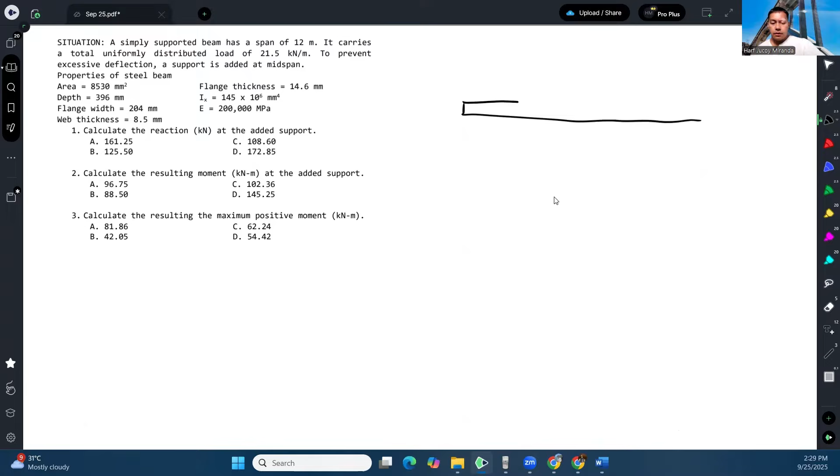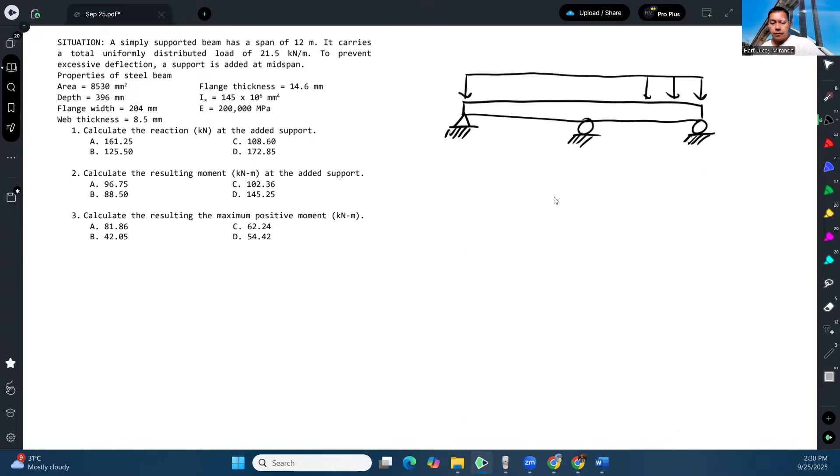So it's a simply supported beam, then a support is added at the midspan, with a uniformly distributed load W. Let's say our span is L. Since the support is at the midspan, each side is L over 2.

So how do we find the reaction? Actually there are many ways, but the first one I'll present is using the superposition method, because our loading here is simple.

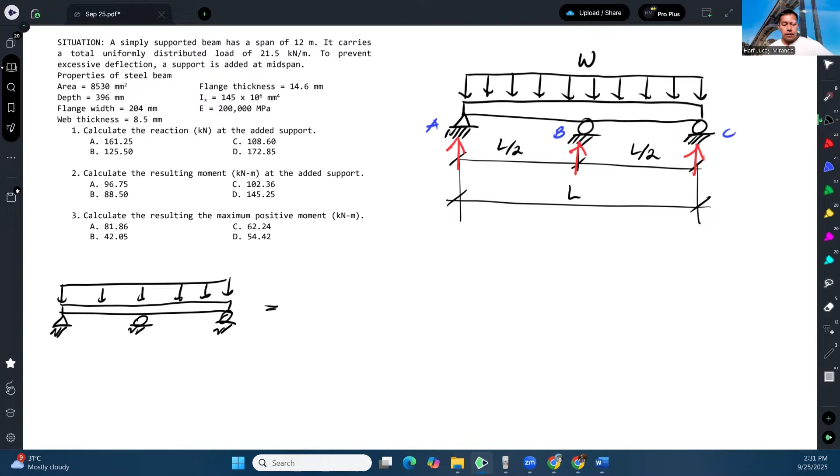Let's call these point A, point B, and point C. By superposition method, that loading condition is equal to this, plus this.

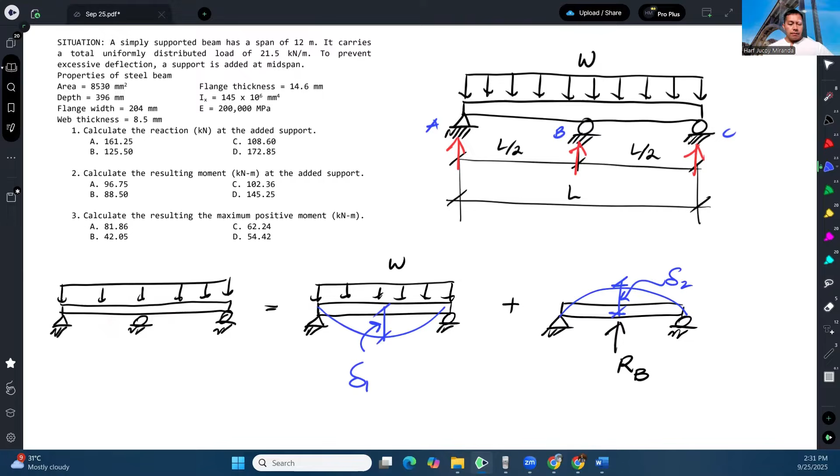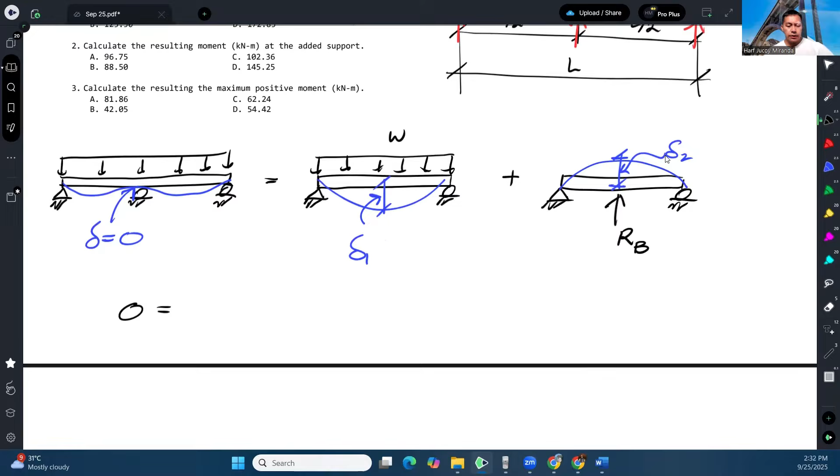So by superposition method, 0 is equal to negative delta 1 plus delta 2, which gives us that delta 2 is just equal to delta 1. But what is delta 2?

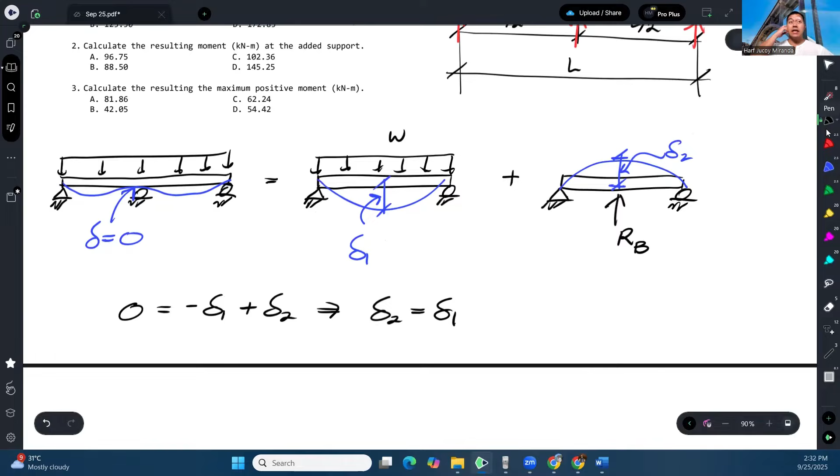This is where we need to remember our formulas. The deflection formula for a simply supported beam at midspan with a uniformly distributed load throughout is given as 5WL to the fourth over 384EI. This is good, we should memorize this since we often encounter it. For a concentrated force, it becomes PL cube, or RB L cube over 48EI.

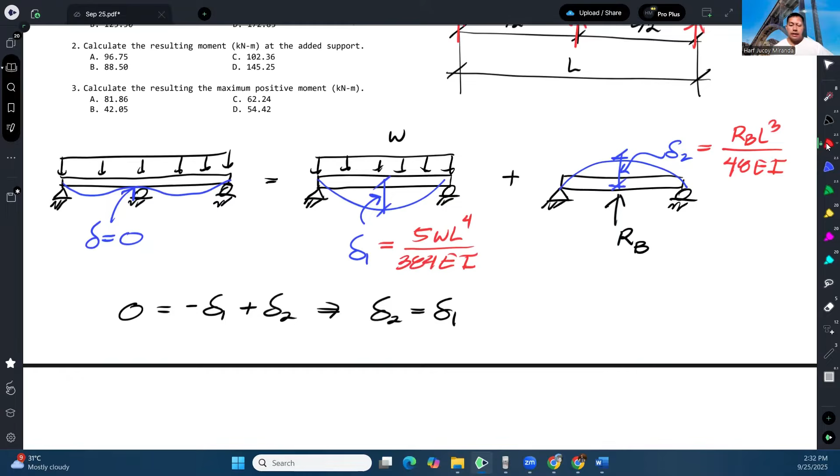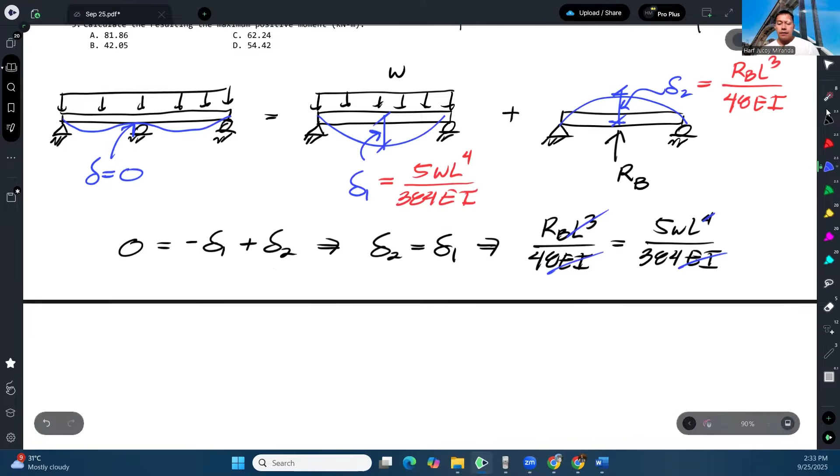Substituting those values, we have RB L cube over 48EI equal to 5WL to the fourth over 384EI. First, the EI cancels, and L cubed cancels, leaving just L. From here, we can calculate the reaction RB to be equal to 48 times 5 over 384, which gives us 5 over 8.

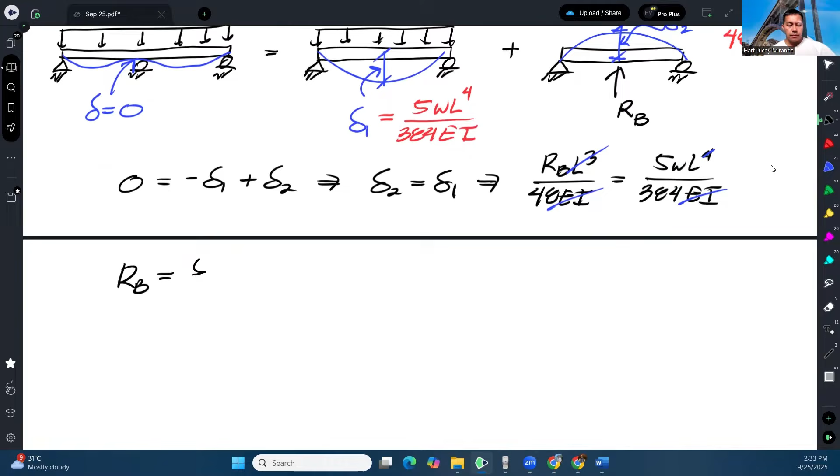And then WL. So this is our reaction at the midspan, 5 over 8 WL. Now that we've calculated the reaction at the midspan, we can calculate the reaction at A and at C, which turn out to be equal.

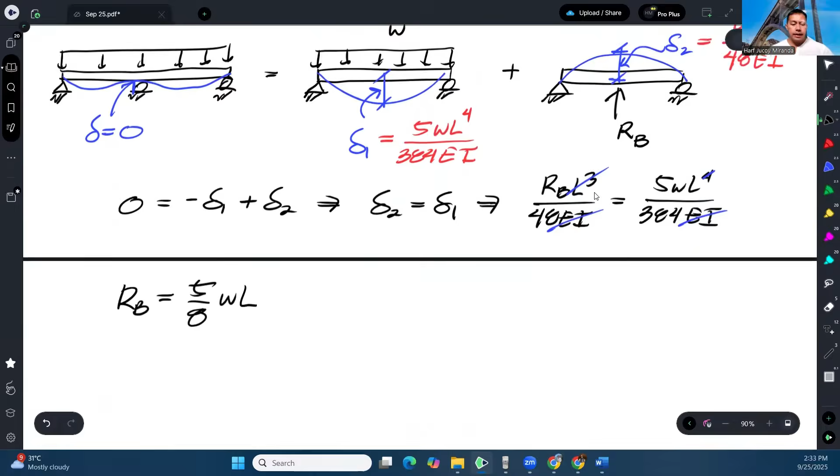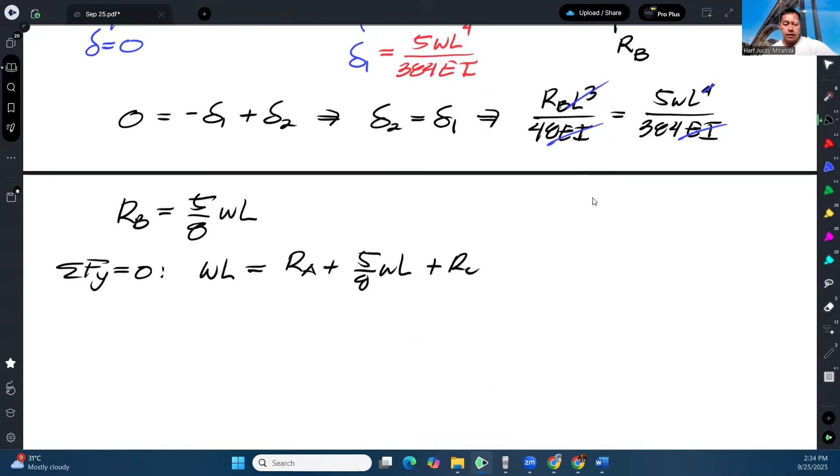So what we do is set summation of forces Y equal to 0. We have W times L equal to RA plus RB plus RC. But because of symmetry, RA must be equal to RC.

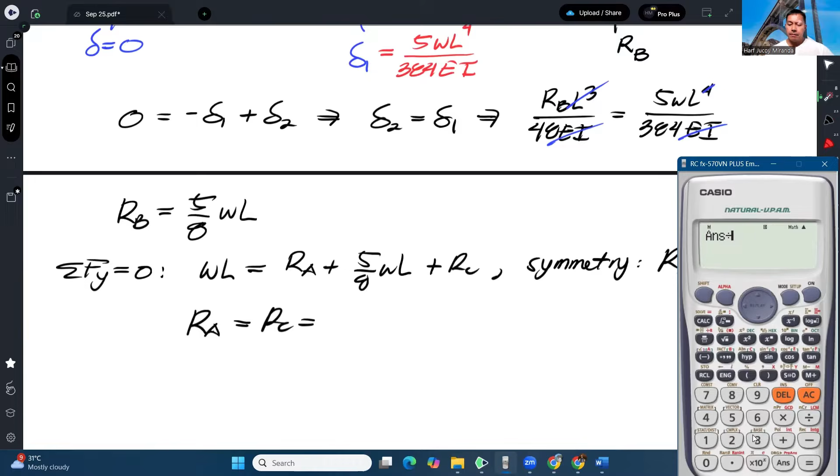So it turns out RA is equal to RC, equal to WL minus 5 over 8, divided by 2. So that's the reaction at A and at C, which equals 3 over 16 WL.

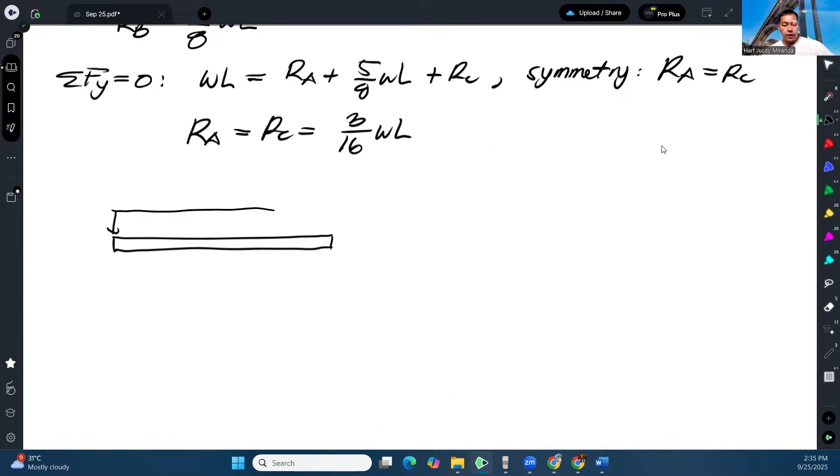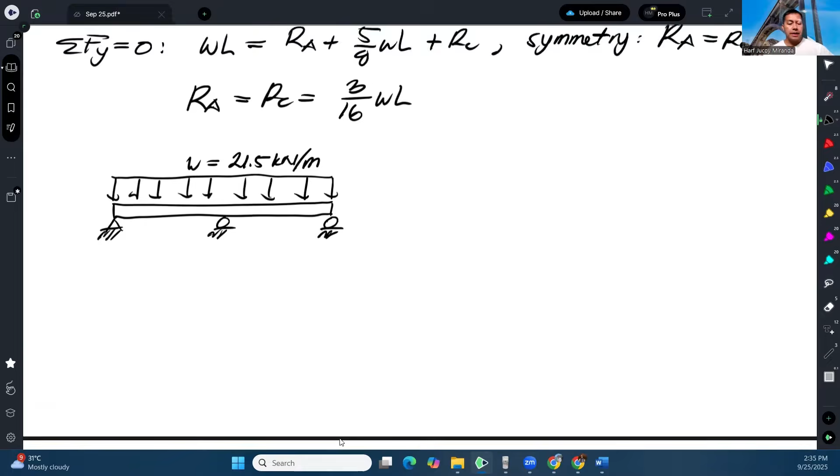Now we know what W is, from the given, W is 21.5. And our span, the full span is 12 meters, so each side is 6 meters. Take note, the full span is 12 meters. So we can calculate the reaction here.

At the sides, 3 over 16 times WL, which gives us 48.375. And at the middle, 5 over 8, giving us 161.25.

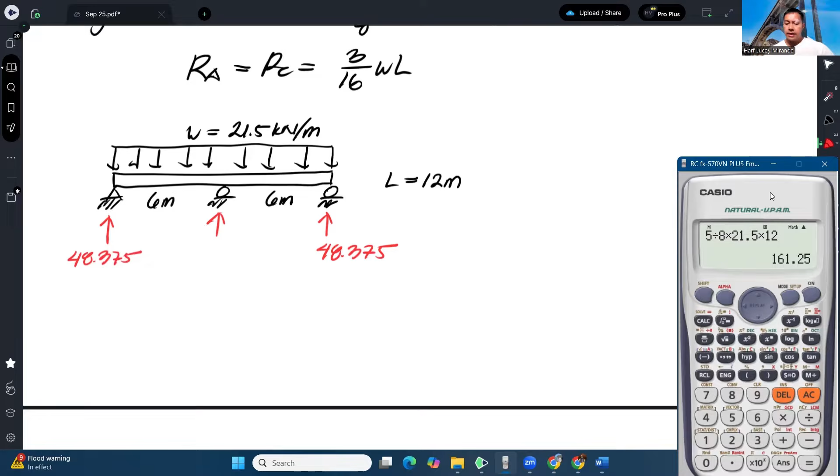So when we draw the shear diagram, it looks like this: it rises by 48.375, then decreases by 48.375 minus 21.5 times 6, which is the area of the load, giving us negative 80.625.

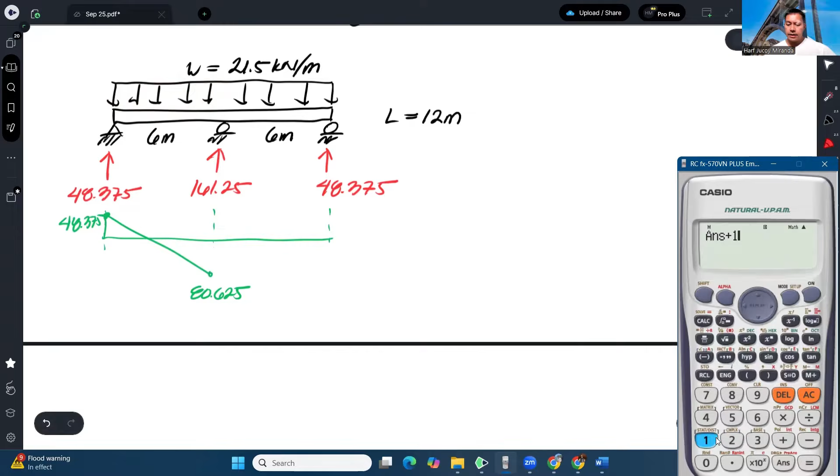Then at the middle, we add 161.25, the reaction, giving us 80.625. Due to symmetry, it comes back down to 48.375. So that's our shear diagram.

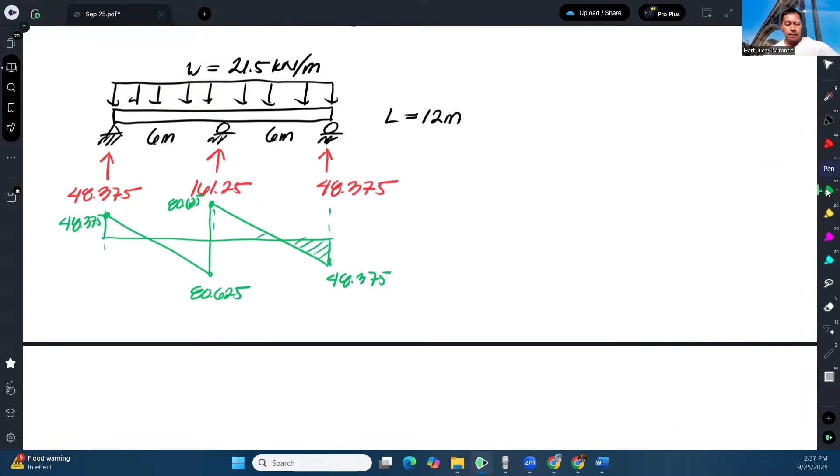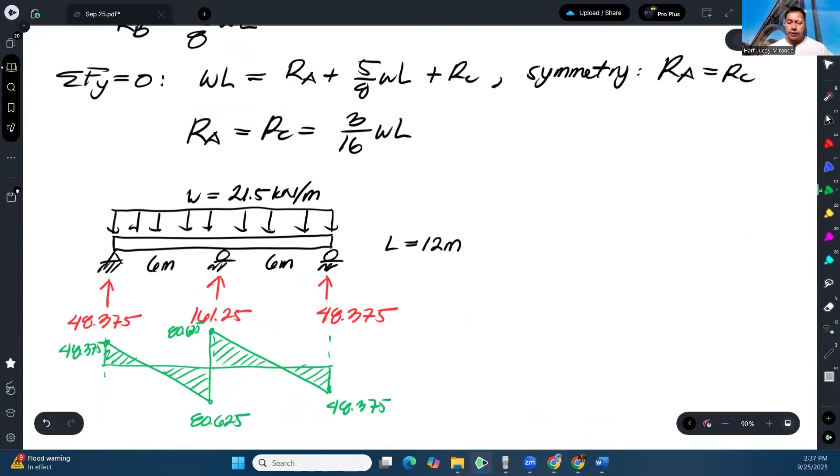Okay, hindi naman tinatanong yung shear. Actually, tinatanong pala yung reaction sa support. So bali, ito na yung sagot natin sa added support. Ito, reaction sa added support. Okay, so our answer for number 1, letter A.

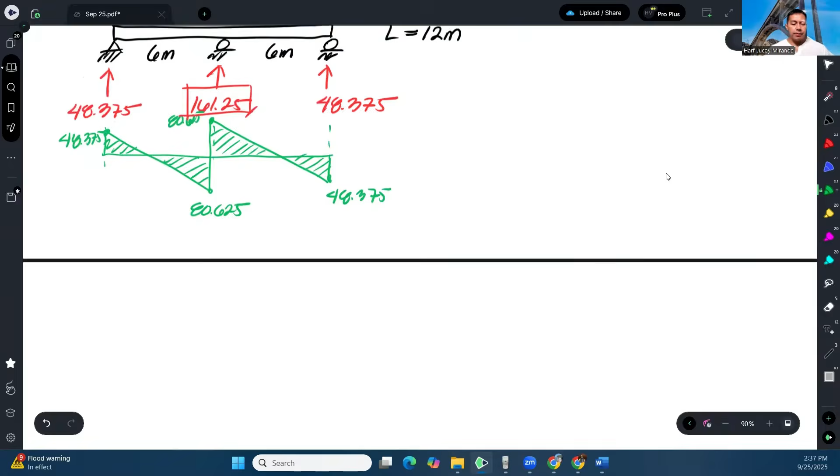So pinapahanap naman yung moment sa added support. Para masagot natin yon, i-drawing na lang natin yung moment diagram. Para ma-drawing natin yung moment diagram, ito yung point of zero shear. Ito, tsaka to. Yan, yun yung mga point of zero shear. Yung sa gitna, walang problema kasi alam natin saan located yan. Ito lang yung problema natin, saan to.

So tawagin ko na lang to na X. Kung X yan, itong kabila, 6 minus X. Okay, so by ratio and proportion, we have X over 48.375 is equal to 6 minus X over 80.625. So from here, we can solve for X.

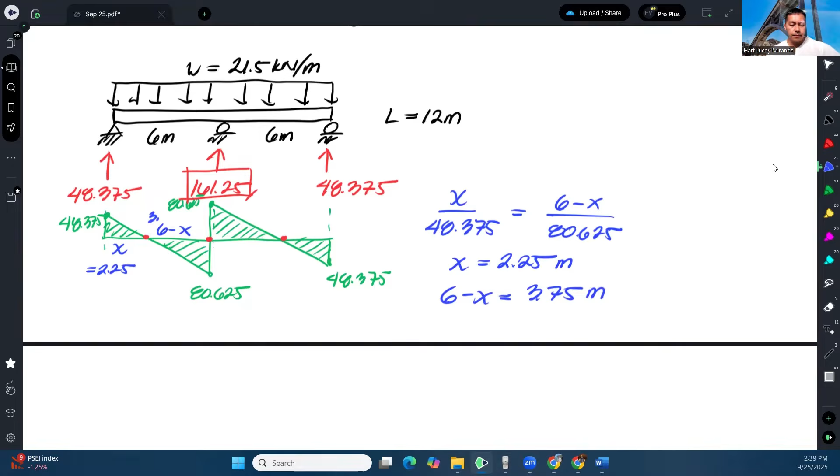So that gives us 2.25. So therefore, yung 6 minus X ay 3.75. Okay, so this is 2.25. This is 3.75. Okay?

So we can now continue drawing our bending moment diagram. Ayan, okay? So starting off with the area of this, na area niyan, so 1/2 base times height. So that is 54.42.

Ayan, so ang itsura ng diagram ganito. And then ima-minus naman natin tong area na to. Okay, so minus 1/2, 6 minus X times 80.625. So that gives us negative 96.75.

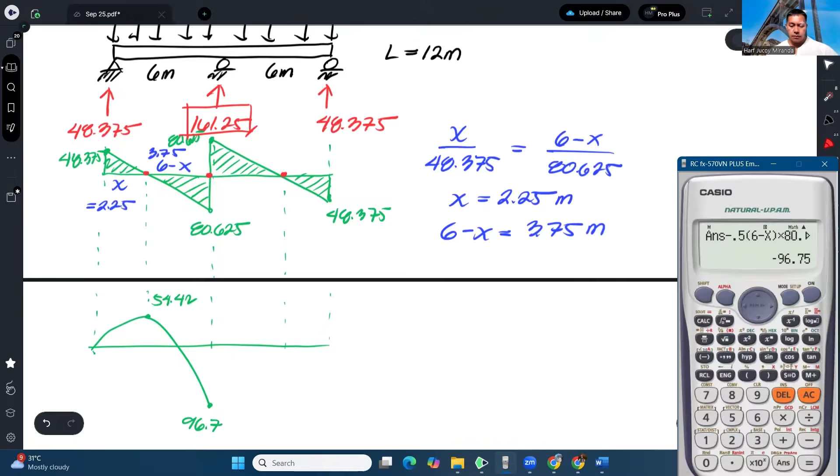Okay, and then due to symmetry, lalabas lang dyan, ito naman magiging 54.42 tas ito 0. So ganyan itsura ng bending moment diagram. Okay, and lumalabas ngayon na yung resulting moment at the added support ay ito. Ito. Okay, so 96.75. So ito yun.

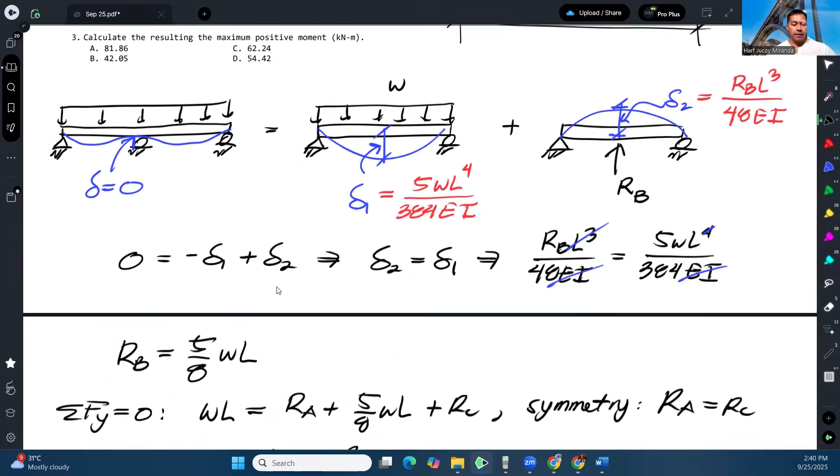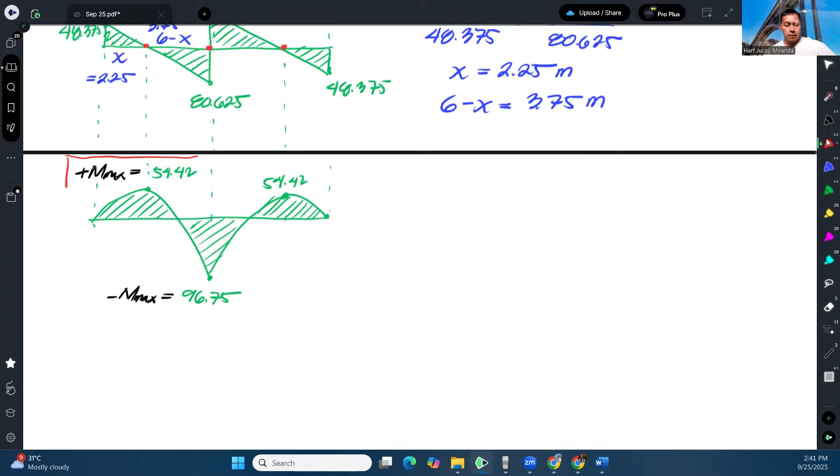Calculate the resulting maximum positive moment. O ano ba yung maximum positive moment? So ito naman yun. So yung maximum negative moment, ito naman yung maximum positive moment. Okay, so that's how you answer that. Okay, so we have 54.42 as our maximum positive moment. Okay, so that's one way of doing it.

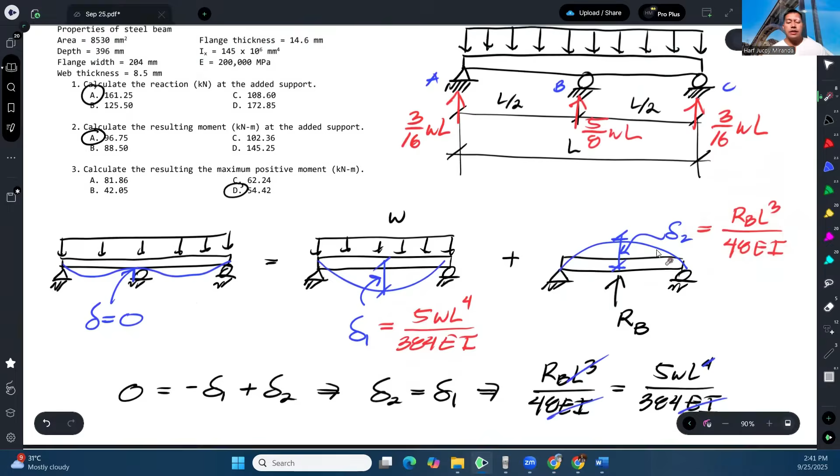Okay, so the key here is really at the beginning, dahil siya indeterminate to the first degree, kailangan mong hanapin yung reaction muna. Yun talaga yung kinakailangan. Kaya ang napili kong gamitin sa pagkuha ng reaction dito is yung superposition method. Ito, kaya kailangan na alam natin yung mga formulang yan kapag mag-superposition method tayo. Which is in this case naman, like I said, common naman itong deflection, common naman itong loading condition na to, common din itong loading condition. Kaya maganda talaga siya, minememorize yan.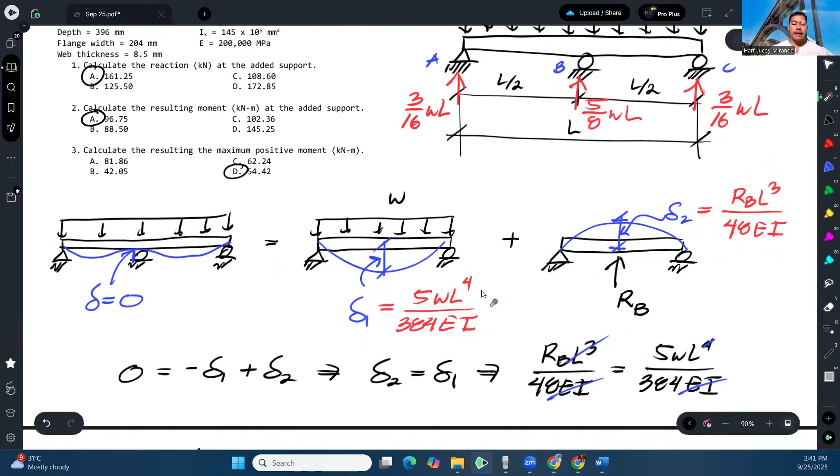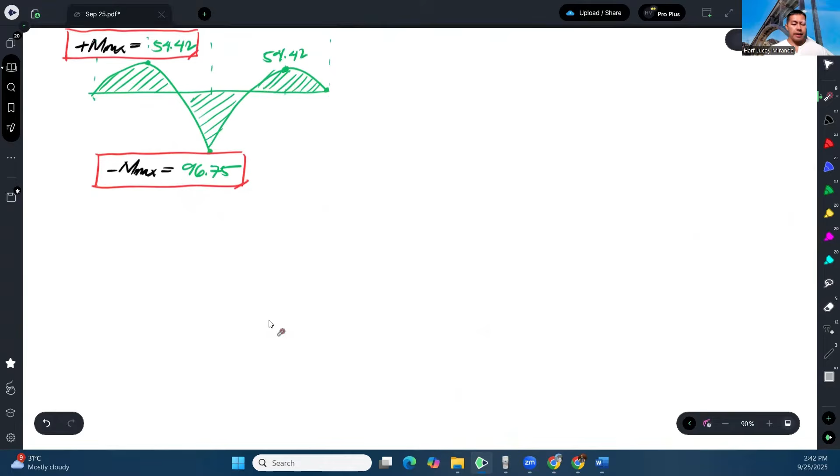Okay, ito, tsaka to. Ito, tsaka to. Okay, kung hindi naman, of course, dito meron ka ring option na mag three-moment equation. Meron ka ring option at mag three-moment equation dito. So kapag ka three-moment equation naman, pakita ko na lang din. So let's say gusto mo three-moment equation.

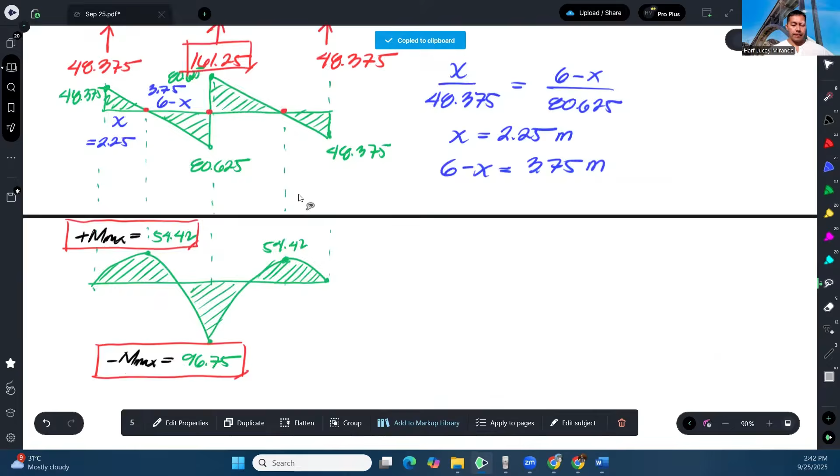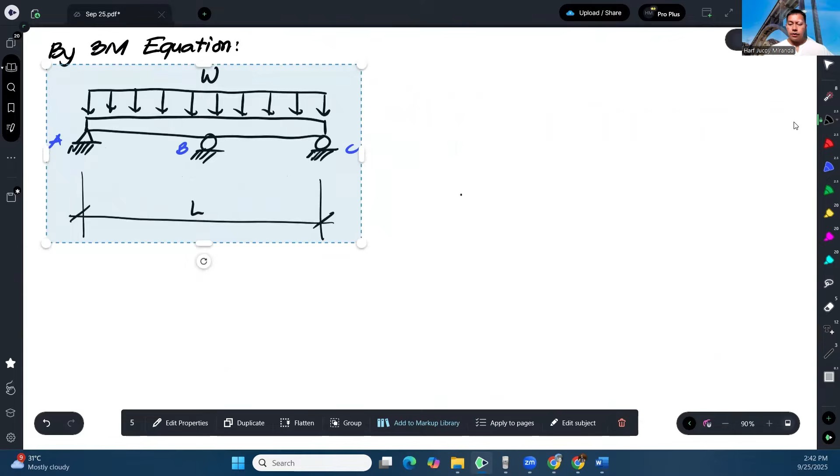Okay, so define muna natin. So di ba dito may in-expect tayo na moment. MA, dito rin. Yan yung moment sa B, tas dito rin, moment sa C. But because the supports at the end A and end C are both simple support, then yung moment dyan ay 0. Okay, parehas 0. So ano ba muna ang moment equation?

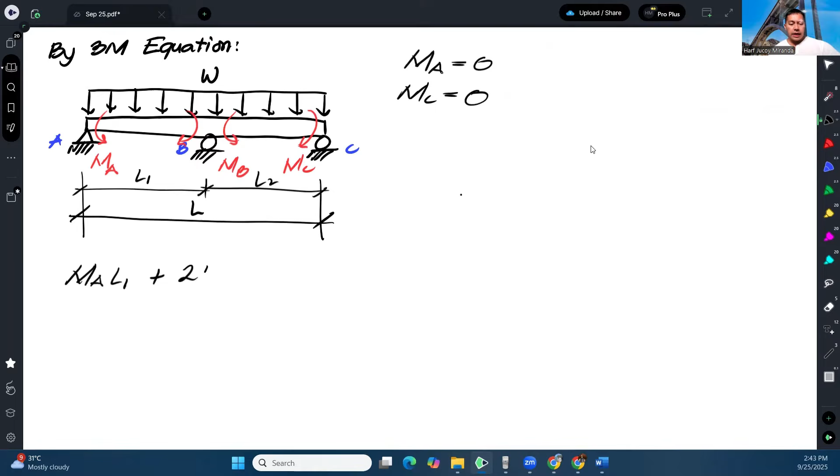So ang moment equation ay MA times L1, kung halimbawang ito ay L1, okay, tas ito naman ay L2. Okay, plus 2 times middle moment times L1 plus L2. Plus moment at C times L2 plus 6A A bar over L plus 6A B bar over L or L1 and then L2 is equal to kapag wala namang deflection, lagay ko na lang 0 pag wala namang deflection. Okay, kumbaga wala naman kasing deflection dito sa mga supports na yan.

Okay, so by the way, it's A1 and A2. So actually, itong part na to lang yung kailangan nating matandaan. Kasi ito yung moment area nung moment diagram nung left and right. Actually, dito, kailangan lang kabisado natin na kung gagamit ka ng three-moment equation, kabisaduhin nyo na lang yung formula ng pagkuha nito. Pero isa lang, na isa lang. Kapag force, isa lang. Tapos meron din tayong formula kapag ka moment yung naka-apply. So doon na lang muna tayo sa force mag-concentrate.

So kapag daw meron kang gantong beam, okay, tapos meron ka ngayon ditong P at a distance A. Okay, tapos kunyari yung span na to ay L. Okay, so the formula there, okay, for 6A1 A bar over L1 will be PA times L squared minus A squared over L. Para naman sa right side, 6A B bar over L2, that is PB times L squared minus B squared over L.

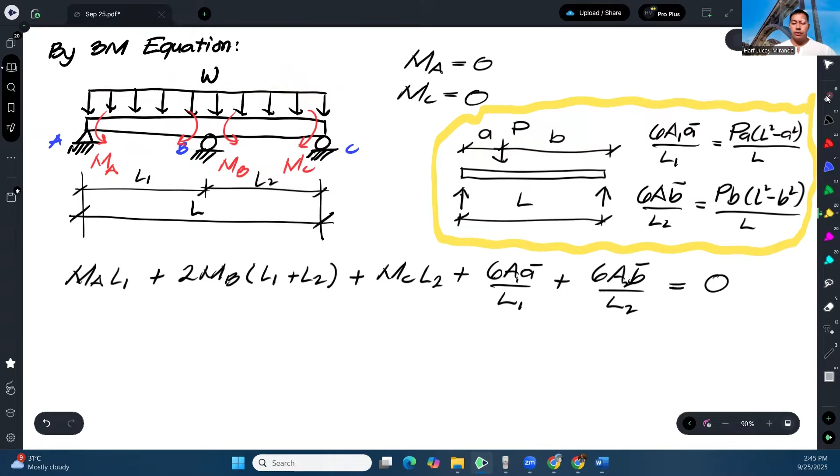As you can see, parang magbabaliktad lang. So kapag ka yung span mo nasa left, ito yung gagamitin mo. Na kapag yung span mo nasa kabila, ito naman yung gagamitin mo. Okay, so parang ganun lang yun. So yan lang yung kailangan natin. So in this case, dahil uniform load, so kapag kakabisado mo to, marami ka nang pwedeng ma-derive kasi. Kaya ito lang yung recommended ko. Pwede mo nang ma-derive lahat kapag ka alam mo to. Okay, so for example, so baba ko muna to.

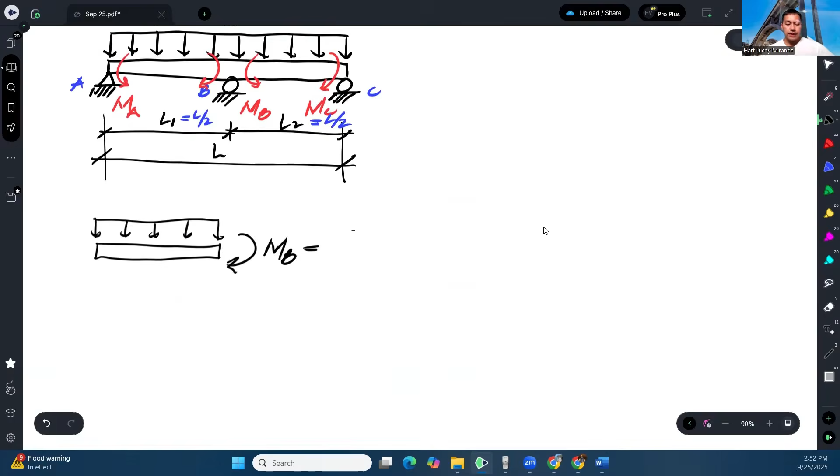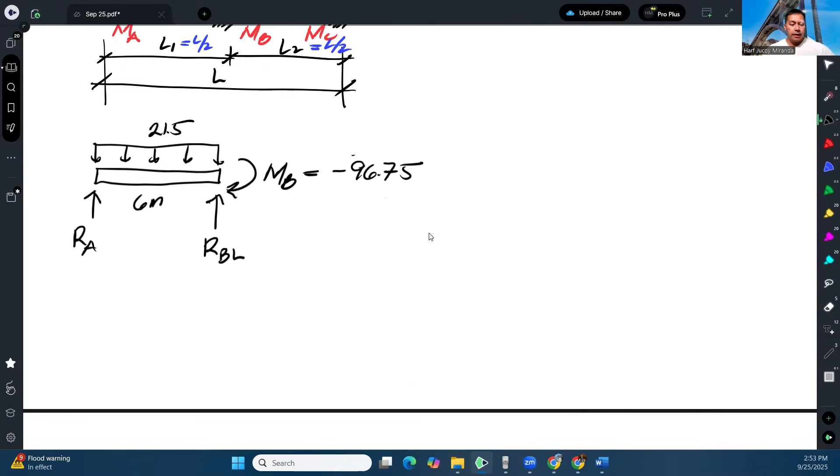So to get the reaction at A, we'll just do summation of moment at B. Assuming counterclockwise positive. We won't put a negative sign since I already proved it's negative based on the direction of the MB, just so it's not redundant.

Okay, so we have 21.5 times 6 times 3. Then 21.5 times 6, times 3. And then RA minus RA times 6 equal to 0. So from here, we can solve for RA.

Ah, something's missing. Sorry, there's still a moment. Okay, then our moment, negative 96.75. Negative because it's clockwise. So therefore, RA can now be calculated: 21.5 times 6 times 3 minus 96.75, over 6. So the reaction at A is 48.375.

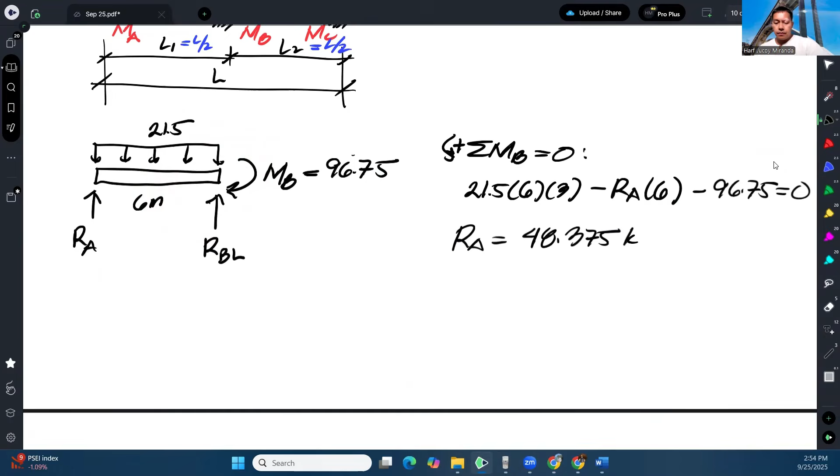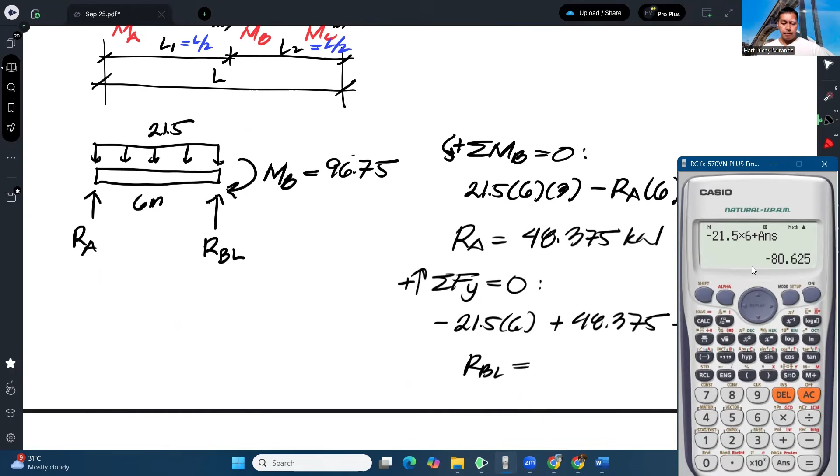Okay, then to get the reaction at B on the left side, summation of forces Y. So we have negative 21.5 times 6 plus RA minus plus RBL. So RBL is equal to 80.625.

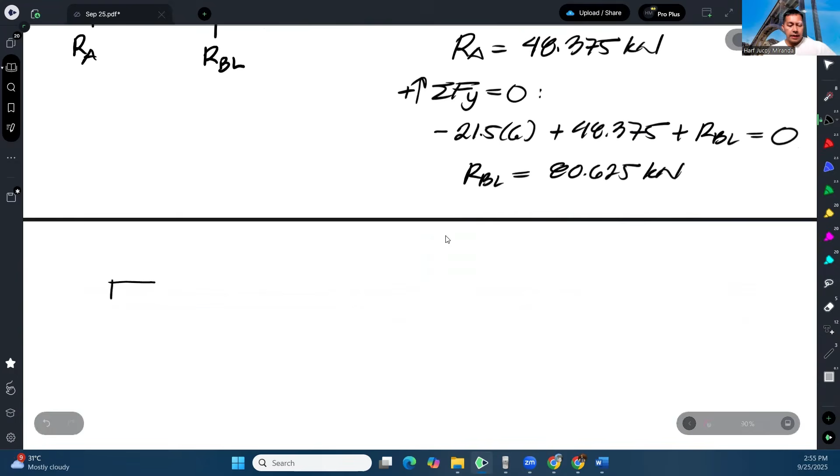Again, this is still just the left side. So if we do the same thing on the right side, on the other side, it's the same, it's symmetrical. This is 21.5, this is the reaction at C. This is our moment, 96.75. Then we have reaction RB on the right side.

And this is also 6 meters. So due to symmetry, the RC comes out as 48.375. Then the RB on the right side is 80.625. The total reaction at B is the reaction at B on the left plus the reaction at B on the right. That is 80.625 times 2, which gives you 161.25.

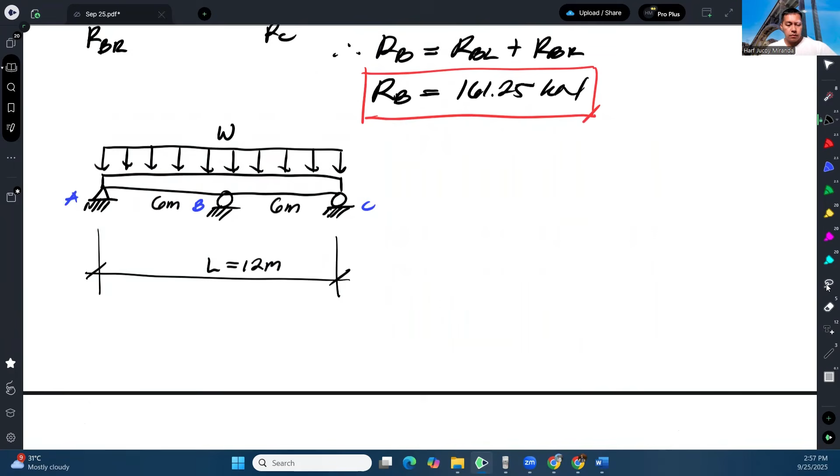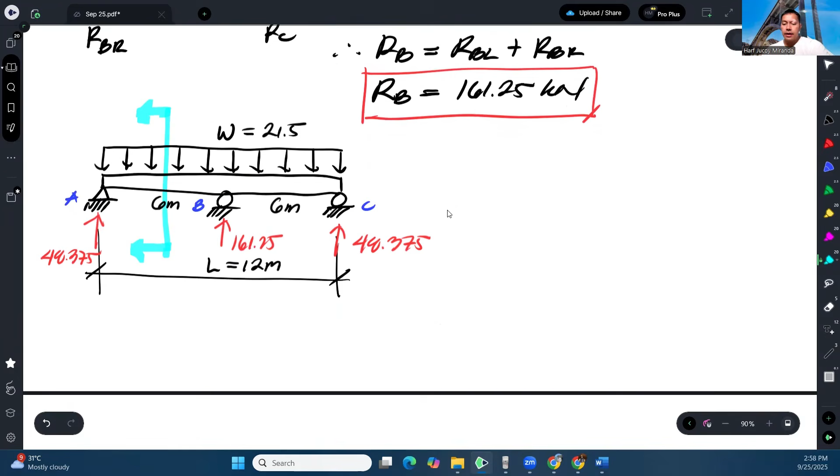48.375, 161.25, and 48.375. So, what I'll do now is find the point of zero shear. I'll cut here. I'll just analyze the left side. So I'll call this section ZZ.

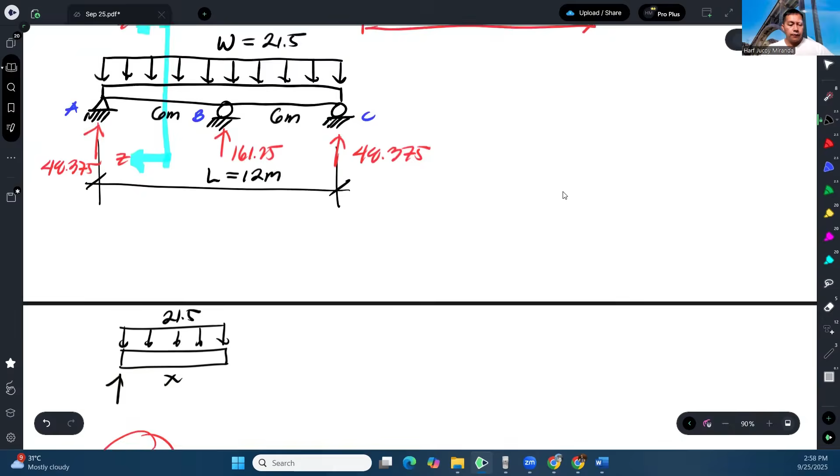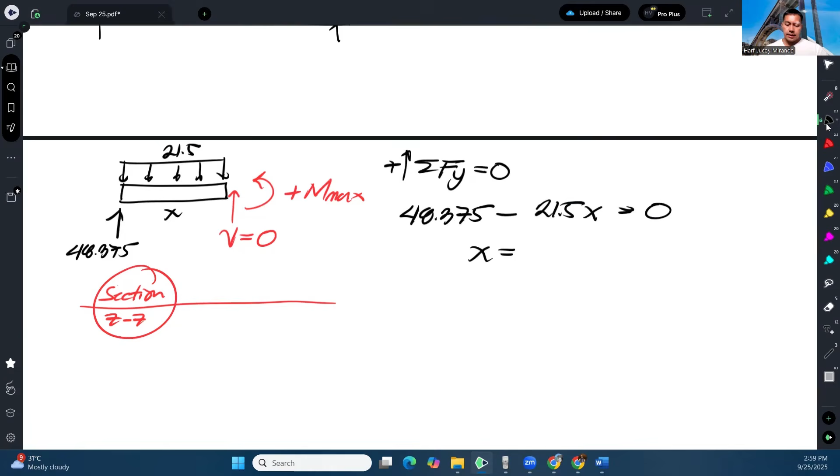So we will look for the point of zero shear by taking summation of forces Y equal to 0, assuming upward positive. So we have 48.375 minus 21.5x equals 0. So from here, we can solve for x. If you compute that, we have 2.25 once again.

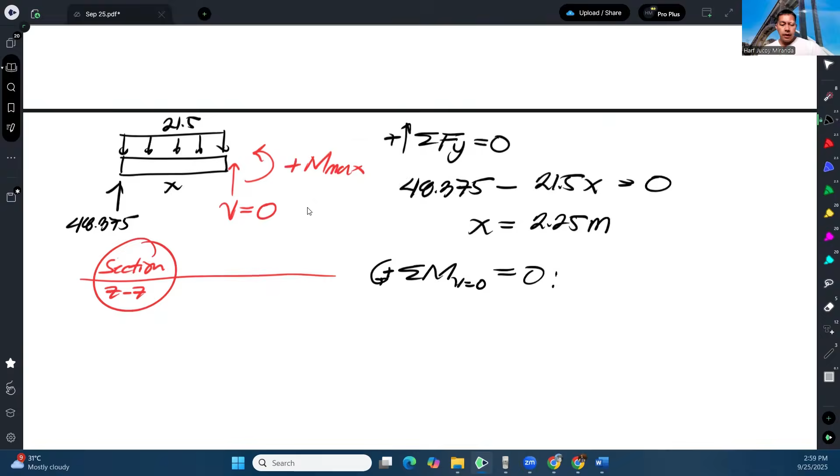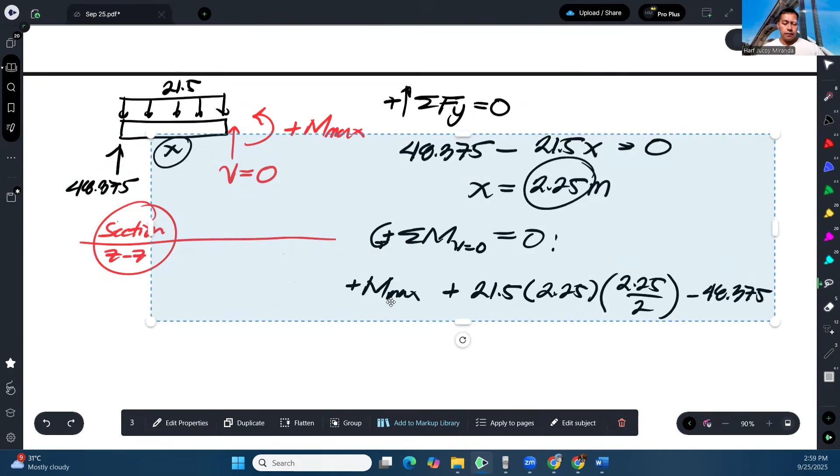Okay, and to get the maximum positive moment, just take the moment at the point of zero shear, assuming counterclockwise positive. So we have M max positive, plus 21.5 times x, x is 2.25, moment arm 2.25 over 2, and then minus 48.375 times x, 2.25 - minus because this is clockwise - that is all equal to 0.

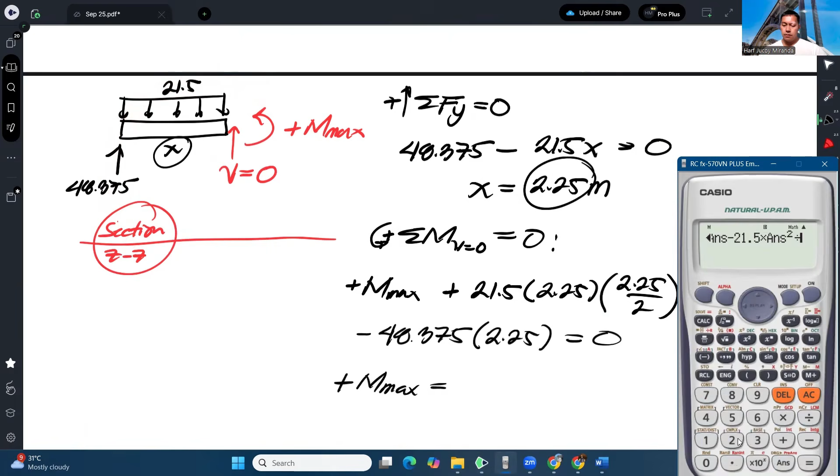So therefore, our maximum positive moment is equal to 54.42 kilonewton-meters. That will be your maximum positive moment.

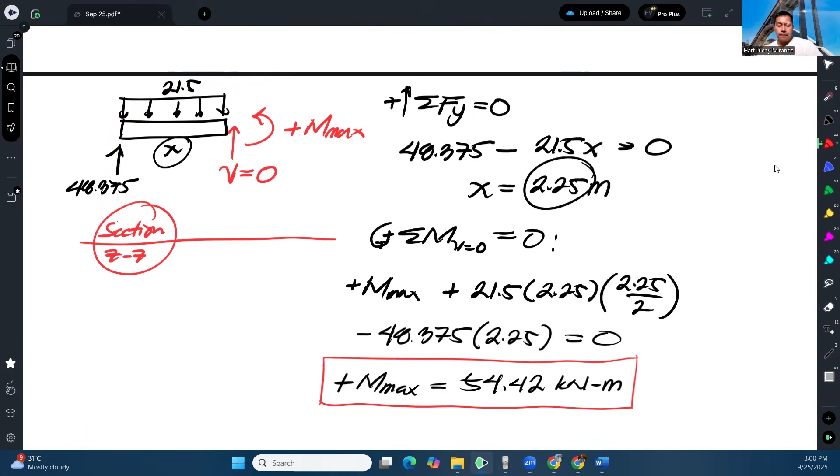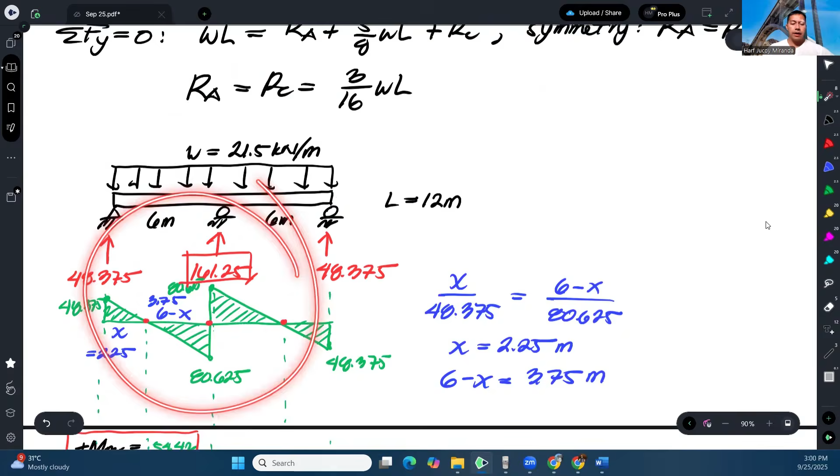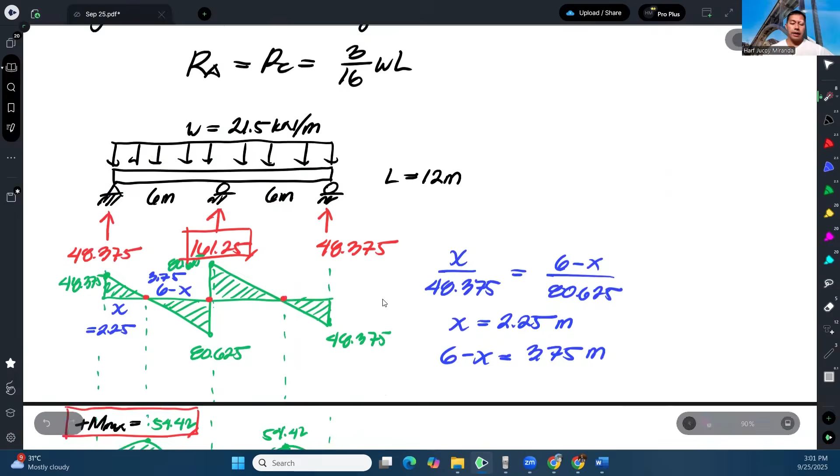So what I did here is the method of section. Actually, you could also have done this earlier. I just chose to show the full shear and moment diagram first. But here, once we got those reactions, you can use method of section if you're familiar that the maximum positive moment is somewhere here, and the negative moment is somewhere here. You just need to find that point of zero shear by method of section. If you don't want that, you have the option to draw the shear and moment diagram. Either way, you will get the correct answer. Alright, and that's how we solve this problem.